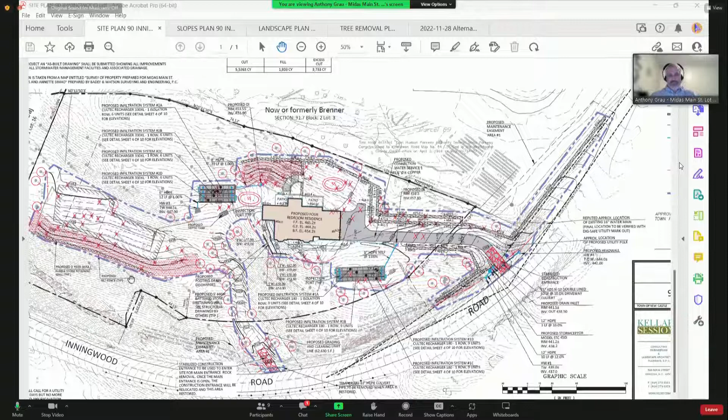Understood. As a point of interest from my standpoint, if you had the preferred plan approved, how would you service the septic area? I would imagine the county would probably request you to build out the expansion, but where are the tanks and where would they be pumped from? How would the tanks be accessed?

The tank's right here where I'm showing. So they'd have to go around and behind the house, okay. Yeah, you'd probably get to here and then run a hose to pump it out. Get to where? This is all flat up in here. Yeah, no, I understand - you'd run a hose and pump it out. Okay, well, I'm sure it's doable, so I understand.

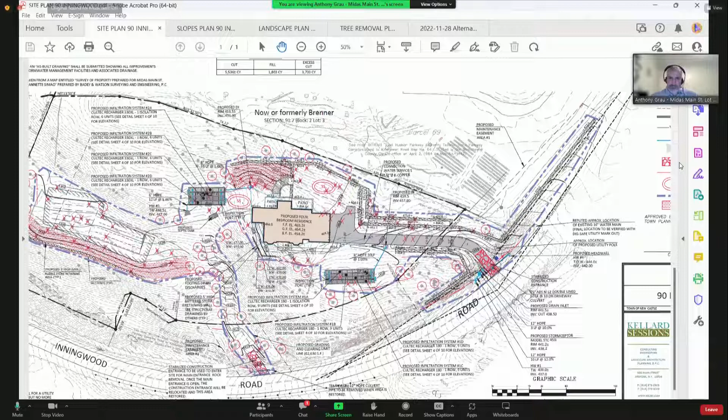So, if I could make a suggestion - this is one of these cases where I believe that if the alternative driveway, which I actually didn't think was going to work, and I was surprised to see that it's so close to 16%, which still makes our town engineer Bob Cioli a little uncomfortable, but it might be within the realm of something doable and acceptable if you massage the elevation of the house itself by a foot or two. That it actually works from that point of view.

So the question I would ask is, if you never had the opportunity, for whatever reason, to do the preferred driveway, and this was the only driveway you could possibly get, would you not develop the property? Could you not develop the property?

It kind of takes me back to the original design where we were getting a little bit of backlash on the steep slopes, so that driveway went to 16%. So now we're getting pushed down there and we're going back to the steep driveway. A 16% driveway, for a homeowner, you probably wouldn't want that either, especially when our winters are the way they are. So the less the better.

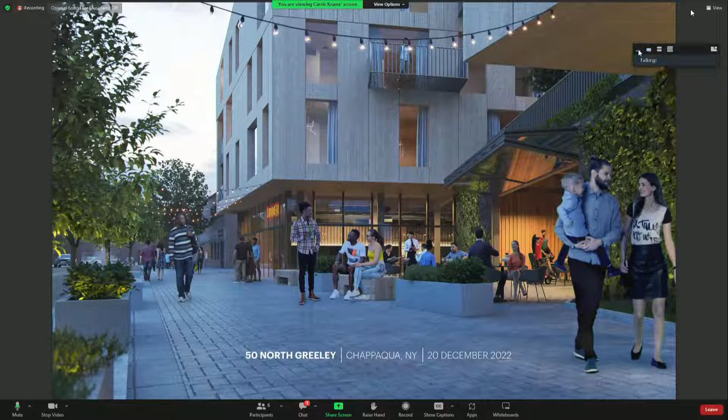The first thing we started to hear was how much affordability was wanted in the building, how much retail was wanted, what type of retail was wanted, and we started planning from there. So in our presentation, you'll notice we went in with a family-oriented restaurant concept on the first floor. We widened the sidewalks on the street. We went from 10% affordable up to 12%, with a combination of affordable and workforce housing - 10% being affordable, 2% being workforce. We took our retail footprint to a little over 4,000 square feet now.

So 2% workforce, how many units? That'll make it essentially one unit. One unit, yeah.

We have come up with an interesting parking concept where it'll be a 1-to-1 parking ratio for the residential. We'll have car sharing for the residential units as well, where you'll be able to actually rent an electric vehicle, so you don't have to have an extra car or a car at all if you don't want to. You'll be able to use a car around town, take it for a couple hours a day, or a long weekend if you'd like. We'll have electric scooters, electric bikes, plenty of bike parking, scooter parking, etc. Not to mention we're right down the street from the train station. We'll additionally have some parking for the commercial, as well as on-street parking as well. So in total, we'll have 53 parking spots, with 45 parking spots for the 45 apartments and 8 for the commercial and car sharing.

There's been a whole load of studies going on around the country about car sharing and the use of cars, showing that you don't actually need as many cars as we think we do anymore. We'll dig into that a little bit further. Being that we're so close to the train station, we think this is an ideal development that doesn't need to be so parking centric, and can really take advantage of the downtown area, the train station, and the community that's here.

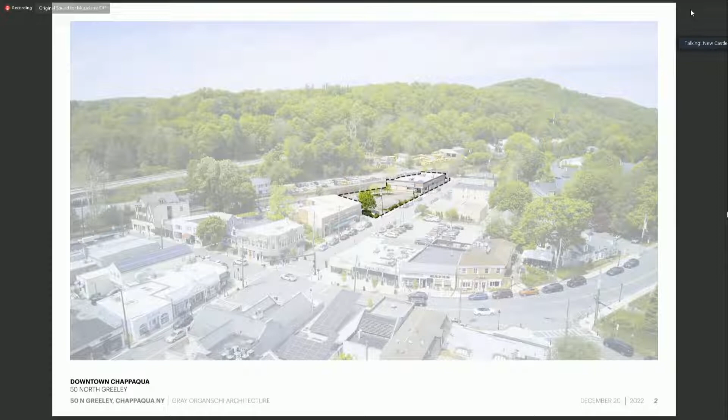We've given this presentation a couple times to the town board in the past, so please tell me to hurry along if you've watched it before. But this is a view of the current site. This was taken back in, I believe, June, from essentially south of the site, with the current Rite Aid. Next slide.

Generally, what we're proposing is exactly as Jeff described. At the ground floor level, it's a mixture of public open space, retail space facing onto the activated sidewalk, amenity spaces for the residential tenants, and along the rear of the property alongside Metro North, the 53 parking spaces that are effectively shielded from the street by the building and the occupied spaces of the building itself. You'll see this more in the plans, but there are clearly defined, increased areas of sidewalk that become actual public spaces.

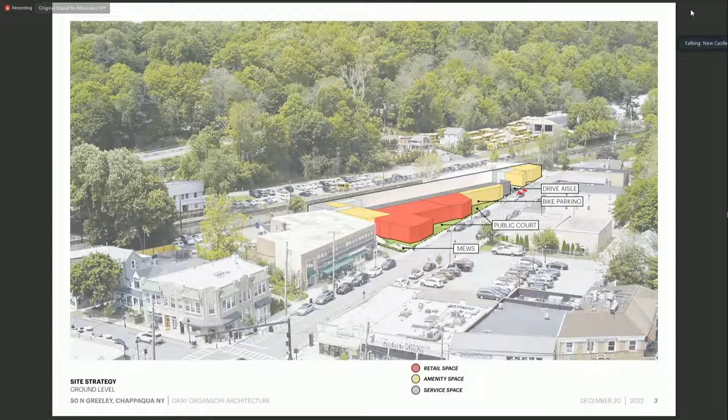They're not a nominal space - in some cases it's 30 feet deep. So it's actually seating, part of the restaurant, part of the retail, part of the amenity space for the tenants. We're really trying to find a way that this development can increase the life at the street level, not only for the residents of the building, but for people in town who might want to come and enjoy the restaurant or partake in the retail. Next slide, please.

One of the challenges with the site, other than the fact that it is sitting empty, is that it's 88% impervious, so this is not a particularly effective contribution to the town's stormwater management. Essentially, all of the water sheds off of this very quickly, and in high rain events this is a problematic condition that will continue to be problematic as rain events become more intense.

So this is the proposed ground floor that was diagrammed earlier. You can see a little more clearly how we have the 53 parking spaces along the rear of the property abutting the tracks, and then a shroud of amenity spaces, commercial spaces, retail spaces fronting onto the public sidewalk. In the center, that fairly thin yellow bar is bike parking, a fairly generous amount for the residents, more than 1-to-1.

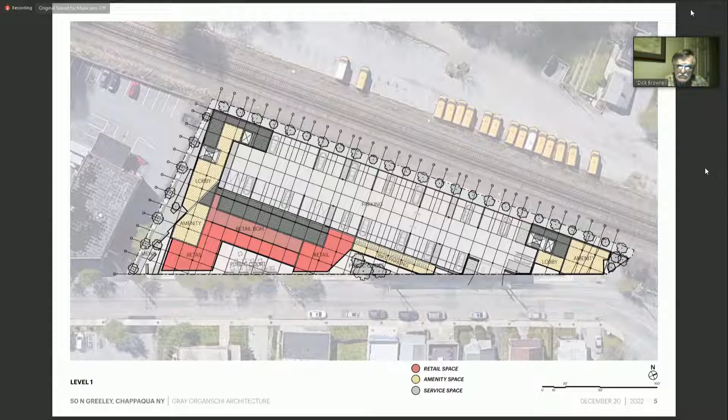Okay, well, should we just let you continue? I'm sorry, I just wanna follow the map, that's all. I have no comment, I'm just trying to follow. No, that's fine, feel free to. Okay, I'll have questions at the end.

You can. Okay, right, yeah, if you want to go to the next slide, so we'll go up to a typical residential floor plate.

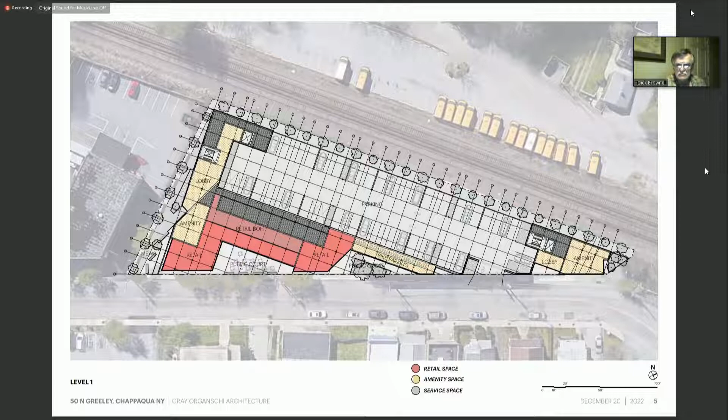As you can see in the organization of the plan, the yellow is amenity and circulation space, towards the west of the site along the railroad tracks. And what we've been very intentional about is not having any of the residential units face onto the tracks, for obvious acoustic reasons, light, air, safety. That is a cost to the project - we're taking away a 430-foot long facade that we're essentially ceding over to back of house uses.

In order to make up for that and ensure all residents have quality access to natural light, ventilation, and privacy, we've created a series of three courtyards. The bars of the building run generally perpendicular to North Greeley, presenting a smaller volume on North Greeley than if we were to do a 350-foot street wall. It also guarantees residents have private garden space that's concealed from the train tracks by the building itself.

So this acts as a shield to the noise of the train and the view of the bus depot across North Greeley, giving it a better backdrop than what currently exists. The apartments are a mixture of mostly 2 and 1 bedrooms, with one studio at each level. As Jeff mentioned, the 12% combination of affordable and workforce units would be equally distributed across all those unit types.

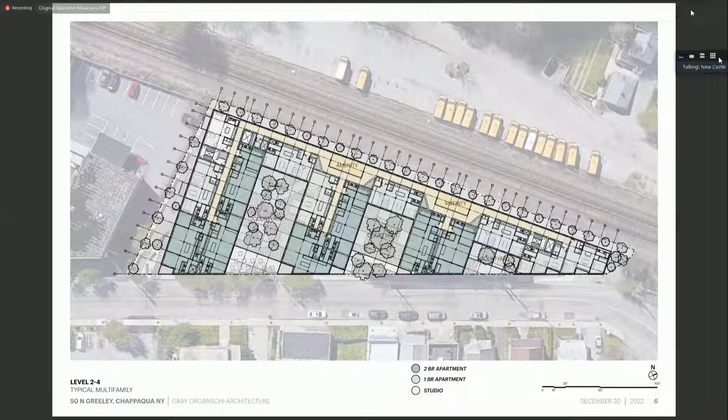Any questions on this plan? Great, go up to the next slide please.

Looking at the roof plan - one of the goals of this project is not only to improve the permeable ratio of the current site, but to really exceed the standards for a development of this scale. One strategy, both in the courtyards and the roofs, is looking at opportunities for green roofs, specifically ones that can meet the DEC standards for green roofs that filter water and retard the flow onto the street. Our civil engineer Langan is working with us on this.

We understand this particular area of North Greeley has been prone to flooding in the past, so if this can act as a sponge, retard that flow, let the system clear, and then discharge at a later time, we imagine this is a fairly valuable amenity to the infrastructure of Chappaqua. So, next slide.

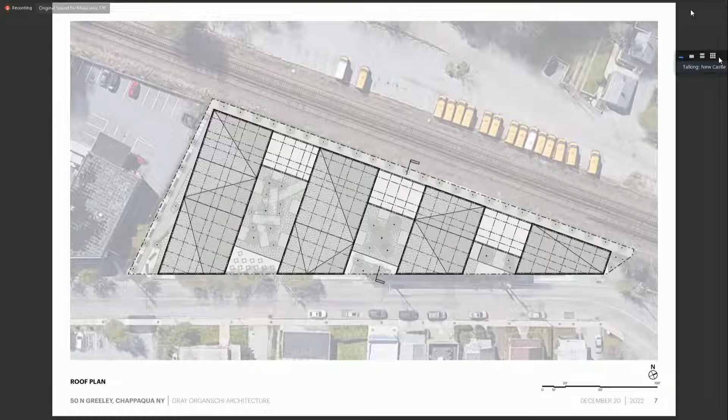This is a section looking to the north. On the west you can see the train tracks and the bus depot. On the east you can see the rise up to King Street. This helps give a sense of the scale of the building - it's 4 stories with a max average height at the slope of 50 feet, which, in isolation from North Greeley, is a large building.

But if you look at it within the immediate context of the neighborhood, you see that the King Street townhomes are actually taller than this building, looking out across the rooftop rather than having their view obscured by the actual facade.

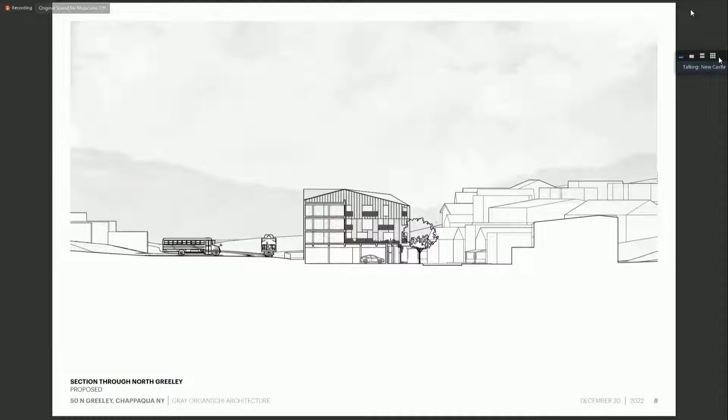Next slide please. This is just a quick rendering of the elevation. You can see the 4 primary volumes of the building facing onto North Greeley, and receding into the background a bit is that linear strip that faces onto the railroad. So this doesn't present to the street as a single monolithic development - it would present more as 4 volumes with an activated ground floor space.

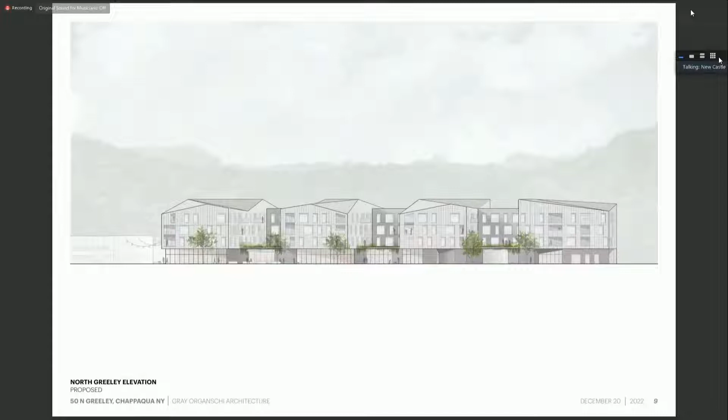Next slide please. Just a slightly more detailed version of that section. Probably worth pointing out, we have a few challenges on the site - one of them obviously is the proximity to Metro North. It is at a higher elevation than our average site, so we need a way to retain, using the parking at grade to make up some of that retainage towards Metro North.

At each of these courtyards we're creating a fairly deep recess, ranging from 50 feet to 20 feet as you move up the site, creating a fairly large courtyard for residents to enjoy. These would be for the residents of the building, not open to the public, but planted in such a way that as you move along North Greeley, this would become the foreground - you'd be seeing planting in front of the buildings.

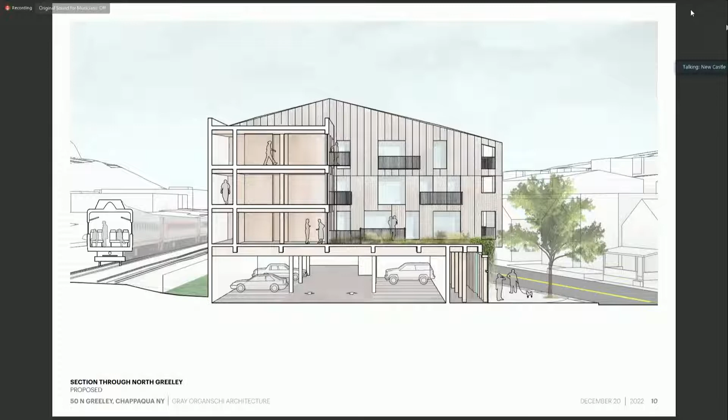And you can see we have some balconies - every one of these residential units has outdoor space, private outdoor space, whether it's an inset balcony or a balcony suspended from the facade. Next slide.

The material palette of the building is intended to use engineered wood siding as the primary siding material. We'd utilize masonry cladding at the base, and where we have a more storefront condition at the commercial, retail, and amenity areas, we'd use a curtain wall system with a timber frame. The materiality is important for a few reasons.

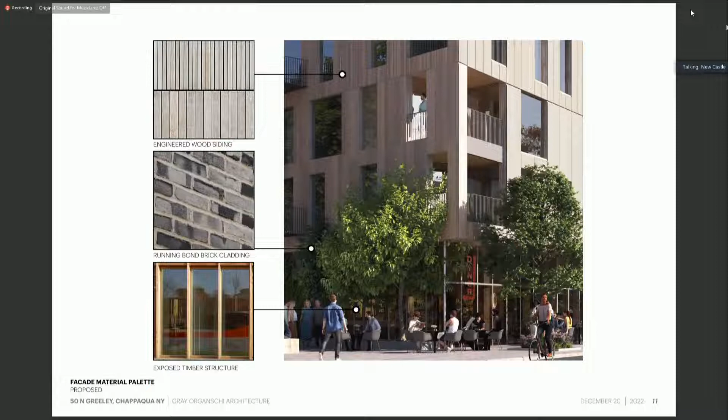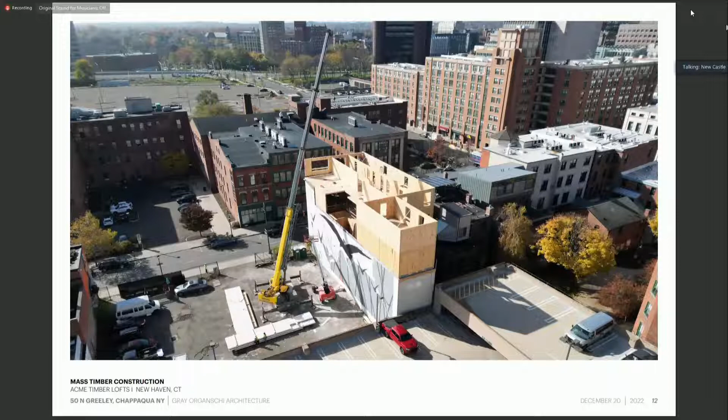The material strategy for this building is actually mass timber construction for the entire project, perhaps safer parts of the parking garage excepted, but otherwise it would all be based out of engineered timber. This is a project currently under construction that our office designed in New Haven. There are a few other examples in the slide deck.

For those unfamiliar with what this means from a materials perspective, engineered timber is laminated dimensional lumber - cross-laminated timber, nail-laminated timber. The end effect is you're taking smaller dimensional pieces of lumber and laminating them, either mechanically or through adhesive, into large format panels up to 10 feet by 50 feet long. These can produce floor decks, walls, ceilings - basically the entire building structure and envelope can be produced out of timber, which is then insulated and clad.

This gives a number of benefits we think are really important to this project. One, it turns the project into a giant carbon sink. All the carbon sequestered by those trees over their lifetime, instead of being returned to the atmosphere when burned or biodegraded, is stored in essentially a durable building. That building will be around for 150 years minimum, during which time that carbon will remain locked up in the building.

It's also incredibly airtight. Instead of building a wall assembly out of dozens of 2x4s and then sheathing and membrane, you have 4 joints at each side of the monolithic panel, and then a continuous layer of exterior insulation. This produces a very well-insulated, very airtight construction.

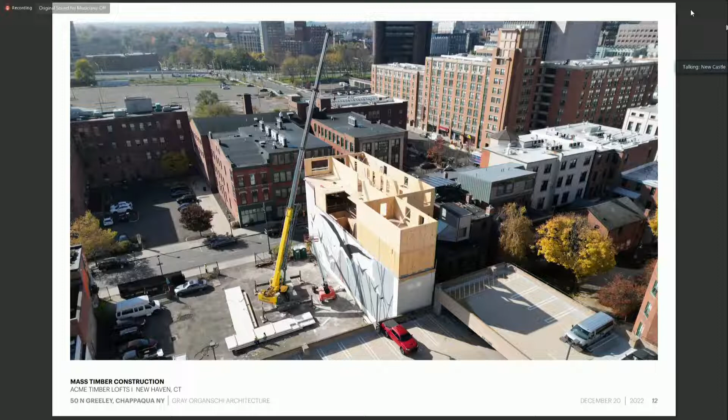Beyond that, it has numerous benefits of living inside with exposed natural materials. It can regulate indoor air humidity by absorbing and desorbing moisture. So the quality of residence life, the quality of construction, contribute to the performance of the building itself. And for construction - what you see here went up in about 5 days.

They come prefabricated, pre-drilled, and go together. It's a bit of a cliché, like a set of Legos. So really the only activity you see on site - maybe the next slide can better illustrate this - is a crane operator, a foreman, and a handful of carpenters with screw guns. That, for the erection of your entire building structure and potentially enclosure, is your site crew.

Are the structural, old-fashioned structural beams made of the same sort of timber material? Yeah, so the traditional way you might think about this is glue-lam, which I'm sure you've seen around. That technology was developed in the 1910s and 1920s. They took that same basic principle and applied it to cross-laminating, so you get 2 axes of strength rather than a single axis of strength.

Glue-lam beams and columns can absolutely be part of this. The big difference is that you went from a single linear element to a plate element, so now you're basically replicating what concrete can do as a construction system. For infill, urban-style construction, this has a number of advantages that we think are appropriate for this building.

So are you suggesting it's essentially built from a kit of panels, and as a consequence there's really no need for beams and columns? There can be a reduction of beams and columns. There are versions where you have - and you'll actually see this in your design proposal for the site. We're a little early for that. Okay, but no, that's fine.

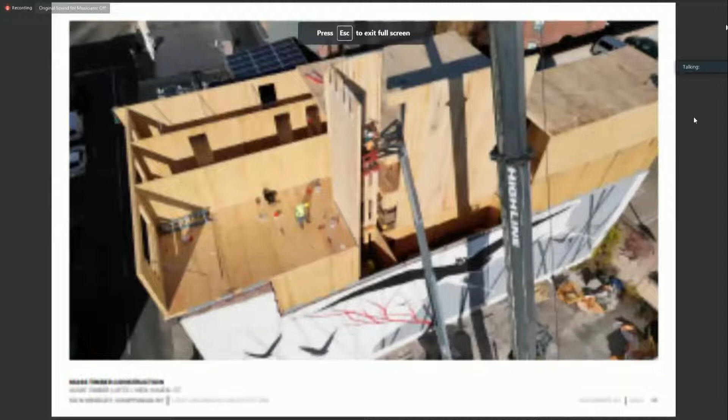I think the next slide might have - or if you advance past it, no, if you go back 2 slides, there's a good image. Oh, it's disappeared. Okay, that's fine.

So in some places, certainly over bathrooms, over kitchens, you might have a drop ceiling, but generally you're able to benefit from that higher floor to floor allowance. I presume this obviously meets New York State Building Code, but what's the rating on this for fire? So it's incredibly resilient to fire.

This is a great example of it. This is in New Haven, currently under construction. This is the continent's tallest mass timber elevator shaft - a 75-foot tall elevator shaft constructed entirely of these CLT panels. It's balloon framed, so each panel is 36.5 feet tall, stacked on top of each other, and this has a 2-hour fire rating. This has been proven by a whole host of fire tests - not only independent manufacturers doing fire tests, but the ATF has done extensive fire testing of this, and the Department of Defense has done fire and blast testing. There's a whole host of Department of Defense Army-based facilities being built out of this.

The benefit is that it's a monolithic product, and wood, when exposed to fire, chars, and that char layer becomes an insulative layer. So as long as you're factoring that char into the calculations, it essentially buffers that interior core and it remains viable as a structural element. Unlike steel, which when exposed to a certain temperature in a fire condition has a catastrophic failure, this is essentially insulated by itself and is more stable and predictable in its fire performance.

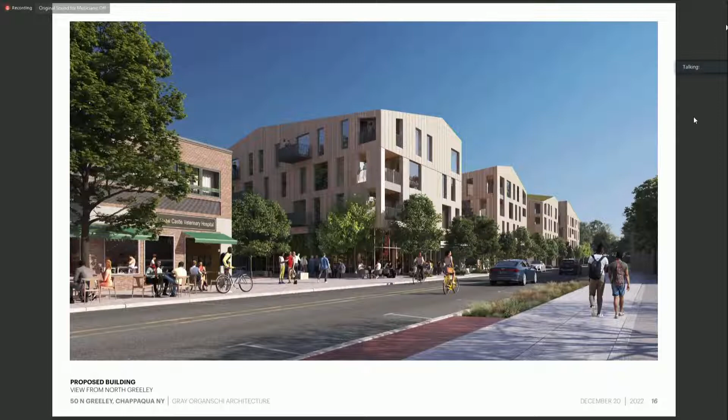Next slide. Does the facade patina over time? Yes. Is that the intention?

Yeah, so I think one of the overarching principles of the development, as Jeff mentioned, is we're looking at materials that are sustainable, that are regenerative. We're looking at building performance systems that use minimal energy, and looking at the facade itself. One of the opportunities is to utilize a wood-based facade, something that's bio-based and carbon storing. There's a whole host of material classes within a wood-based facade.

What we're looking at particularly, and we have samples of this to look at if you're interested, is an acetylated or thermally modified wood. It's essentially a stabilized wood that, unlike traditional wood that has to be re-oiled every two years, comes with a 50-year warranty. It's been baked at a really high temperature, which essentially eradicates the things that would either degrade it or be eaten. It essentially sterilizes, for lack of a better term, the wood. There's a whole host of ways you can treat it aesthetically, but on the durability side, it's basically the same as if you were to put fiber cement.

This is a view looking essentially in the middle of the property, looking south towards the main courtyard space, towards the diner. You can see the dimension of the sidewalk that we've allowed for here is fairly expansive. Next slide, please.

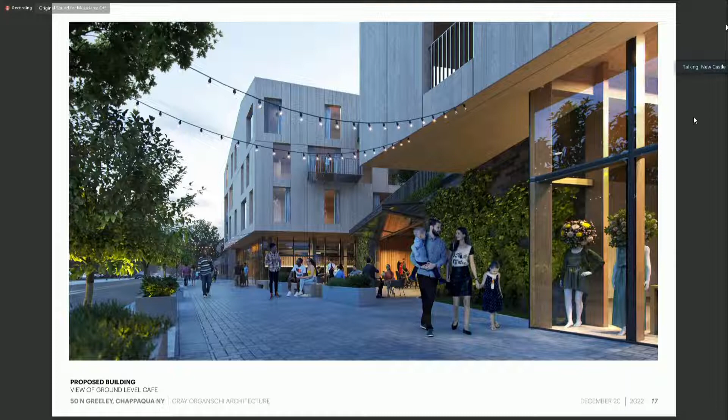Are we looking west? No, east. You're looking at King Street, but up the hill. Is this slab on grade, or are you on top of the parking lot? You're on top of the parking garage, with retail. So your back is to the railway, to the rail track station.

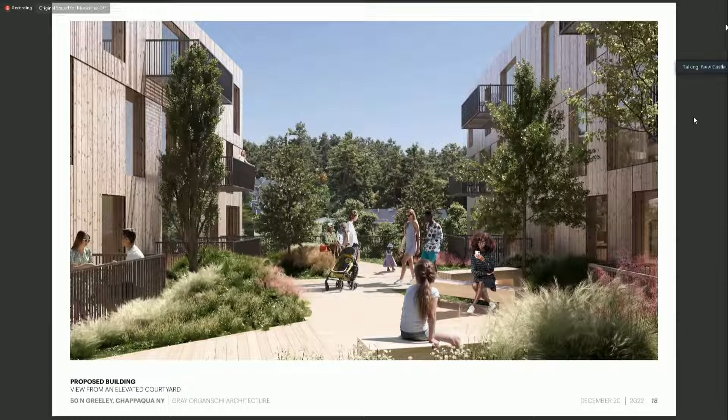Next slide. And a slight aerial, again from the southeast, showing the full context of the project. Our goal would certainly be to enhance the view of the neighbors as they look out to the west over the train line at the bus depot, perhaps offering a more attractive alternative to what currently exists.

You want to tell us about the green roofs? Sure, there's a whole host of ways. We're showing roofs that are not flat, a series of serrated roofs for a variety of reasons: to add opportunities for solar panels with about half the roofs canted towards the south, to add visual interest given the scale of the building, and to respond to the roof forms we see elsewhere along Greeley.

Planting on the roofs is something we've done extensively in our practice, and it's a common practice in the Northeast. These would be locally sourced sedum, a thin layer, not a fully intensive green roof with soil depth for shrubs or bushes. This would be low maintenance, using native materials.

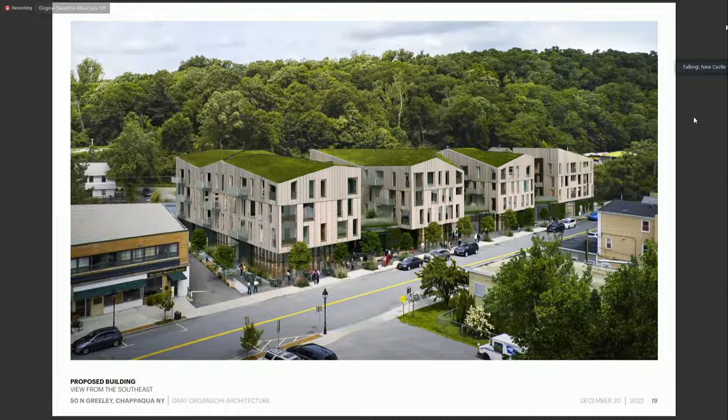Next slide. Getting a little closer in on this particular block. And next slide. Finally, from the northeast, looking down along North Greeley.

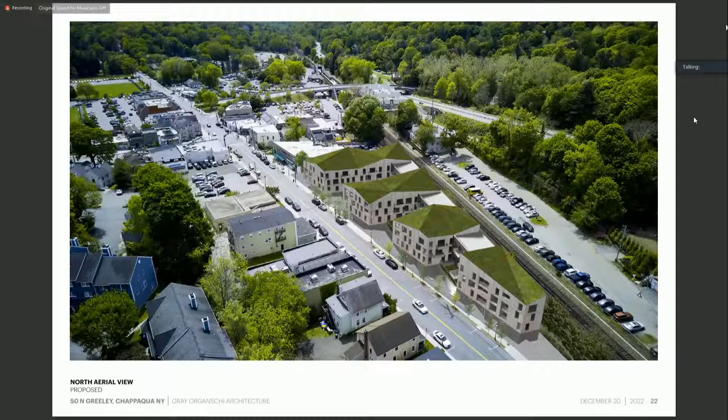Next slide please. So this is the zoning and building code data. We can talk about this in more detail. This will mirror what Phil outlines in terms of the special permit language, and that language is really written around the type of building we've proposed here. Happy to dive into this in more detail now, or we can wait until after Phil goes for questions, whichever you prefer.

I'm ready to hear from Phil. Okay great, terrific, thank you very much. Thank you, I'll take my seat.

Good evening, my name is Philip Carmel. I'm a lawyer representing the applicant, and my job tonight is to talk about the zoning we propose to facilitate the project we're proposing.

We're not here for site plan approval yet, we will be soon I hope. We're not here for the special permit yet, we will be soon I hope. The real reason we're here is the town board has referred the zoning to the planning board for your review and recommendation, comments, positive, negative, questions, whatever your review yields. So I'm here to describe the zoning, and if there are questions I'll try to answer them. If you have questions I don't know how to answer, we can submit a follow-up letter after the meeting, if that would be helpful.

Okay. So, I think Tom touched on this a little bit — there's sort of the process by which we are making these decisions, and that's worthy of a lot of questions, and certainly I think it can be improved significantly.

When it comes to the concept of what's being proposed ultimately, I absolutely love it and am very, very supportive of the concepts. I think the presentation, especially Andrew's, was exceptional and very well prepared, and really helpful to understand both the concept and the ultimate proposal here.

Most of my concerns and questions will be on how to make this successful for you, but really for the town, because I would love to see more of this — this is very much a new concept for the town of Newcastle. I want to make sure that any input we have furthers the potential success of this project, because it has far-ranging implications for the rest of the town, beyond just this site. So I'm very excited to see where this goes and to be as helpful as we can to make sure it is successful.